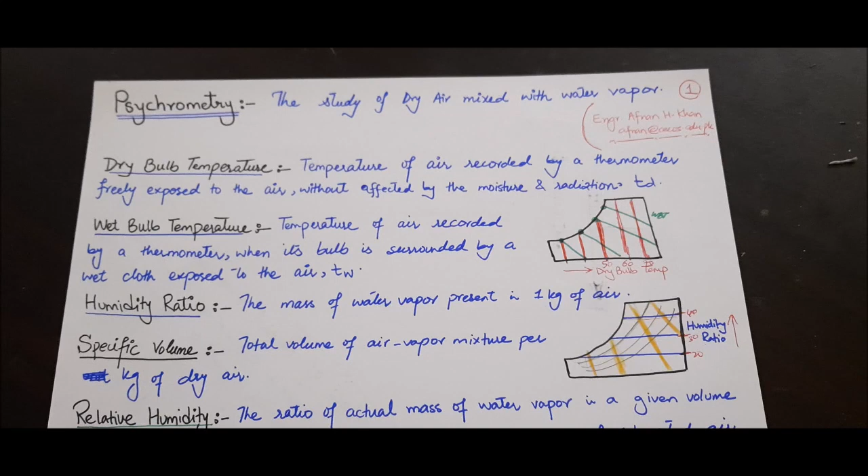आज जो टॉपिक हम पढ़ने जा रहे हैं वो है साइक्रोमेट्री, जिसके नोट्स ऑलरेडी अपलोड हो चुके हैं। तो आज हम उसको थोड़ा सा देखेंगे कि हम साइकोमेट्री या साइकोमेट्री से रिलेटेड जो चीज़ें हैं उसको कैसे पढ़ते हैं।

और जो साइक्रोमेट्रिक चार्ट हैं उनसे हम डेटा कैसे लेते हैं। तो सबसे पहले साइकोमेट्री या साइकोमेट्री है क्या?

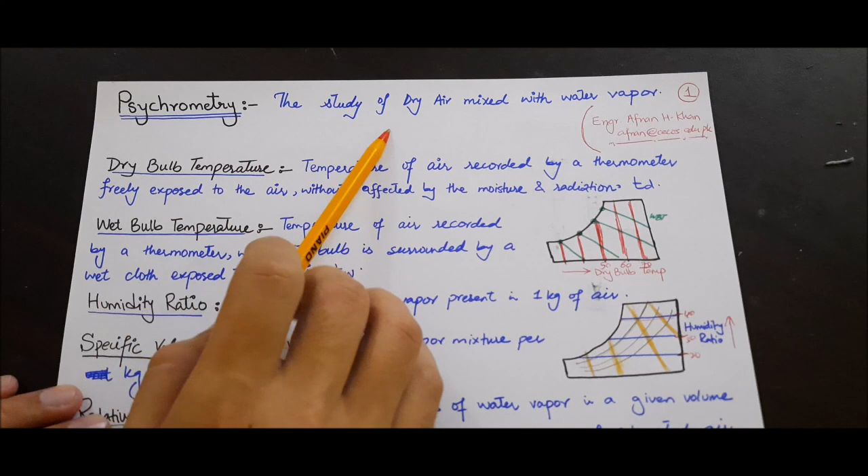साइक्रोमेट्री इज़ बेसिकली द ब्रांच ऑफ इंजीनियरिंग which actually deals with the study of dry air mixed with water vapors. So हम dry air जब water vapor absorb करती है, depends कितनी absorb करती है.

If it absorbs the maximum amount of water vapor, so we called it saturated air. So वो depend करता है कि वो behave किस तरह करती है, तो उस properties को basically हम air properties जो होती हैं उनको पढ़ते हैं, जिसमें air भी हो और water vapor भी हो या ह्यूमिडिटी हो।

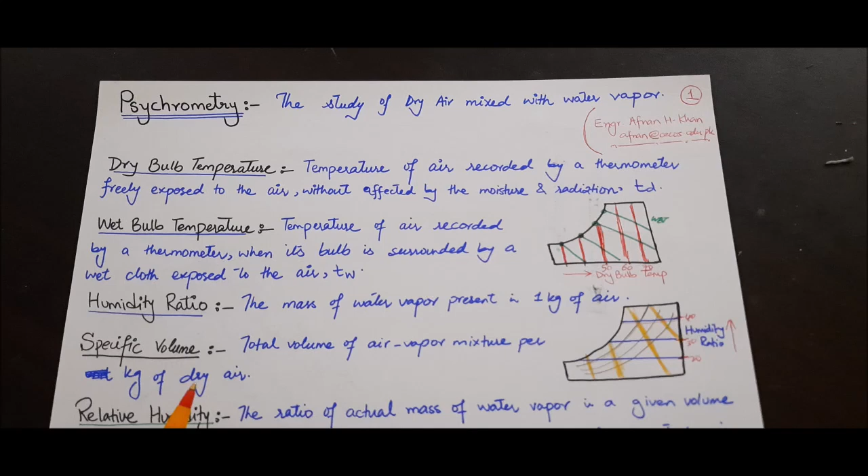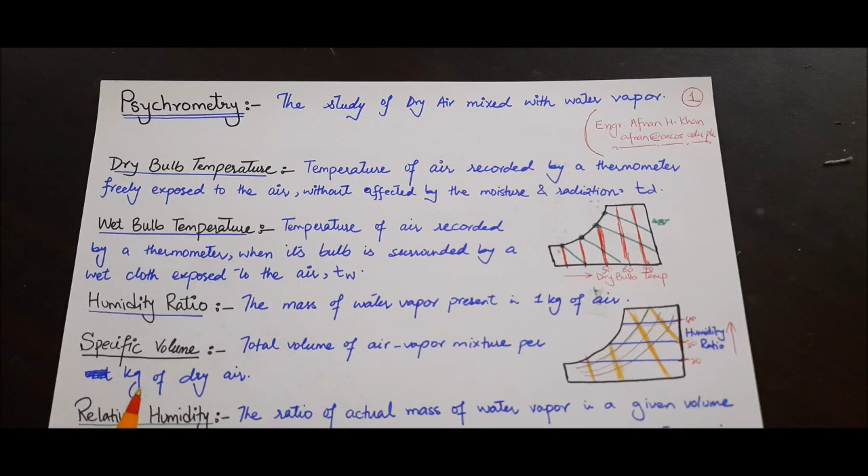अब साइक्रोमेट्री में हमारे पास चंद पैरामीटर्स हैं जो बहुत ज़रूरी हैं समझने को, और वो चार्ट पे हम कैसे पढ़ते हैं या चार्ट में वो कहाँ पे होते हैं, तो उसके लिए आज का ये लेक्चर है।

सबसे पहले हमारे पास है ड्राई बल्ब टेम्परेचर। नाम से ही जाहिर है कि इसमें हम एयर का जो टेम्परेचर है वो रिकॉर्ड करते हैं when it is freely exposed to air without any effect of the moisture or radiation।

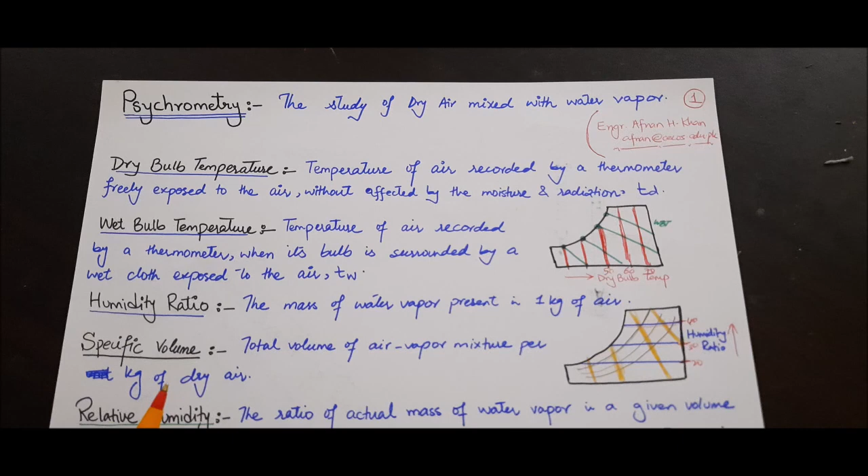और it is denoted by TD, the dry bulb temperature. So dry bulb temperature is the temperature of the air recorded by a thermometer।

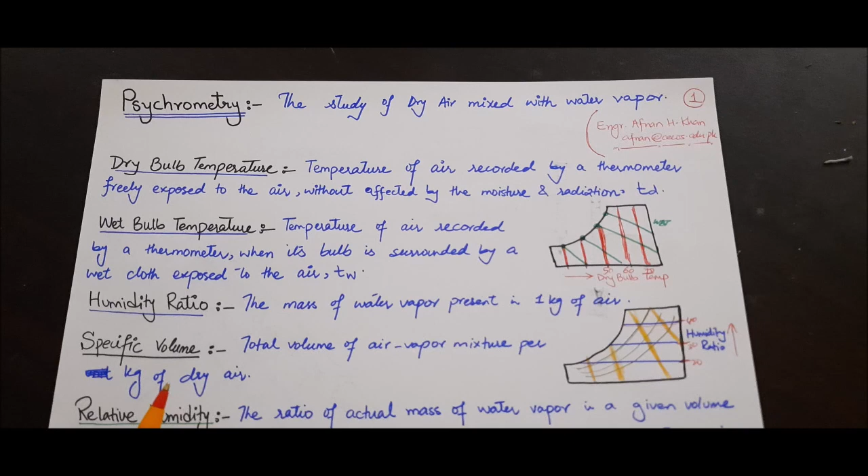By a thermometer it means it is a sensible heating process. So the sensible heating or the sensible heat which has been recorded through a thermometer, when the thermometer is freely exposed to the air and there is no effect of the moisture or the radiation on that thermometer।

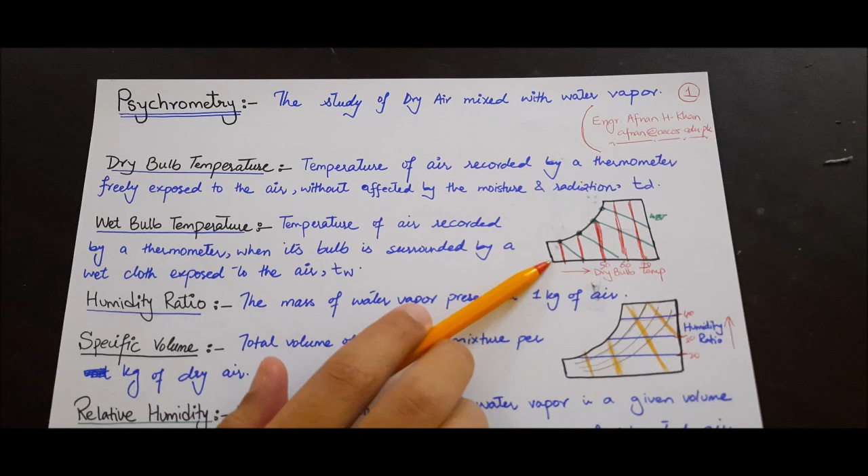अच्छा जी, ये साइक्रोमेट्रिक चार्ट में हमारे पास कहाँ होते हैं? तो ये यहाँ पे आप देखें तो ये हमारे पास इस लाइन पे होते हैं, यानी नीचे हॉरिजेंटल लाइन पे। ये आप देख सकते हैं हमारे पास ड्राई बल्ब टेम्परेचर। इसको रीड कैसे किया जाता है?

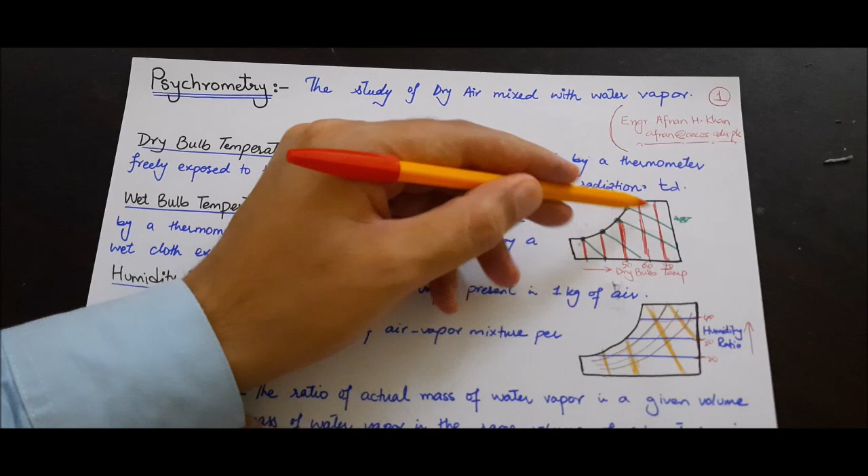तो ये जो बिल्कुल इसके वर्टिकल लाइन्स हैं, ये हमारे पास जो रीडिंग है वो यहाँ नीचे है, और इसका जो लाइंस हैं ये ऊपर बिल्कुल आप देख सकते हैं वर्टिकली अपवर्ड। सो दीज आर द ड्राई बल्ब टेम्परेचर लाइंस ऑन द साइक्रोमेट्रिक चार्ट।

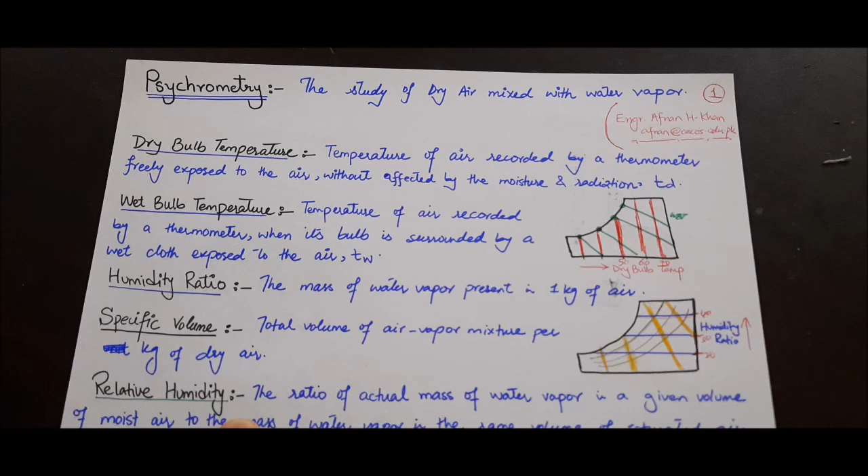अब ड्राई बल्ब टेम्परेचर के साथ साथ हमारे पास चूँकि मॉइस्चर है तो वेट बल्ब टेम्परेचर भी ज़रूरी है। सो वेट बल्ब टेम्परेचर क्या है? ये वही है कि अगर आप एयर का टेम्परेचर रिकॉर्ड करो बाय थर्मोमीटर व्हेन इट्स बल्ब इज सराउंडेड बाय अ वेट क्लॉथ एंड दैट इज़ एक्सपोज टू द एयर।

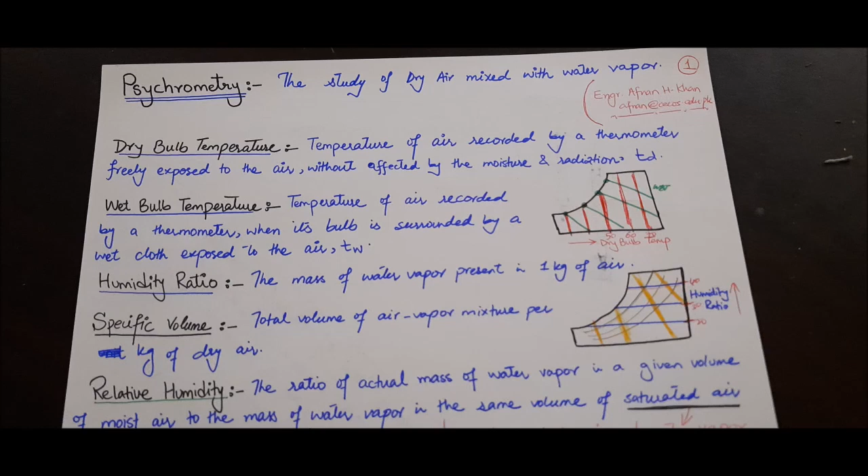तो आप थर्मोमीटर के जो बल्ब है, फॉर एग्जांपल इफ दिस इज़ अ थर्मोमीटर, सो ये अगर इसकी ये जो टिप है ये इसका बल्ब है।

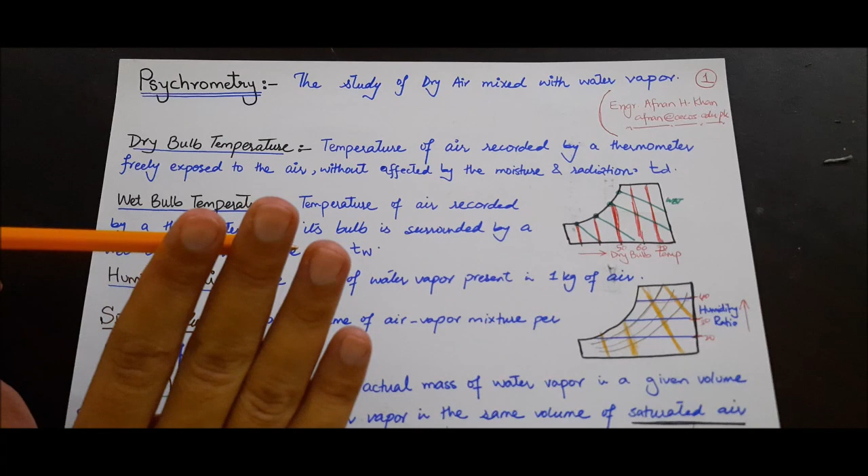तो यहाँ पे अगर वेट क्लॉथ आप इसको कवर कर दो तो उससे फिर जो उसके साथ एयर लगेगी, जाहिर सी बात है फिर वो उसमें मॉइस्चर मिक्स होगा और जो हमारे पास टेम्परेचर आएगा दैट वुड बी द वेट बल्ब टेम्परेचर।

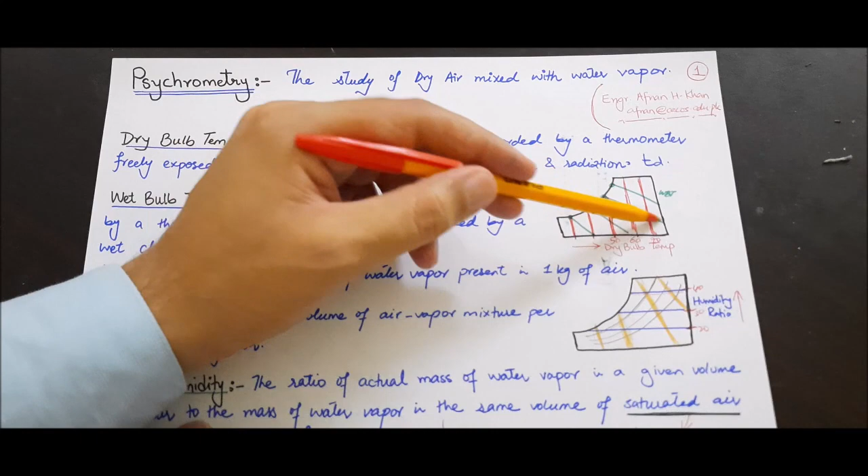अब वेट बल्ब टेम्परेचर कहाँ पे शो होता है? तो ये जो ग्रीन लाइन आपको नज़र आ रही है ये विच इज़ अबाउट 45 to 60 डिग्री के एंगल पे होगी ये, तो ये आपको 45 और 60 के बीच में भी हो सकती है या एग्जैक्ट 45 भी है।

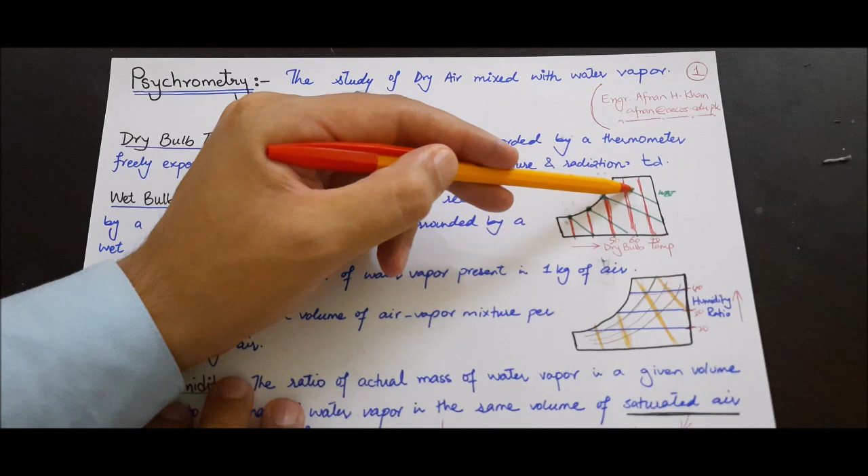तो ये आपको जो है वेट बल्ब टेम्परेचर शो करेंगी साइक्रोमेट्रिक चार्ट पे। आई होप आपको समझ आ रही होगी। ये जो लाइंस हैं ग्रीन कलर की, दीज शो वेट बल्ब टेम्परेचर, करेक्ट।

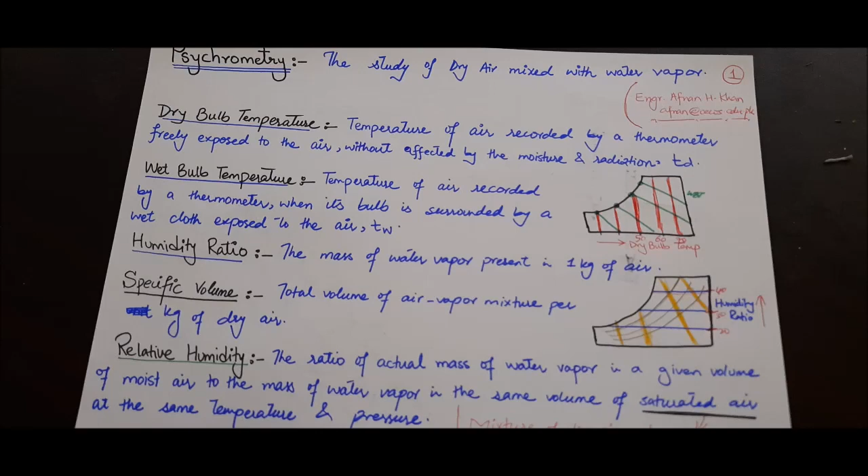नाउ द थर्ड थिंग इज ह्यूमिडिटी रेशो। Now what is humidity ratio? It is the mass of water vapor present per kg of air, यानी 1 kg of dry air के अंदर कितनी वाटर वेपर का मास है।

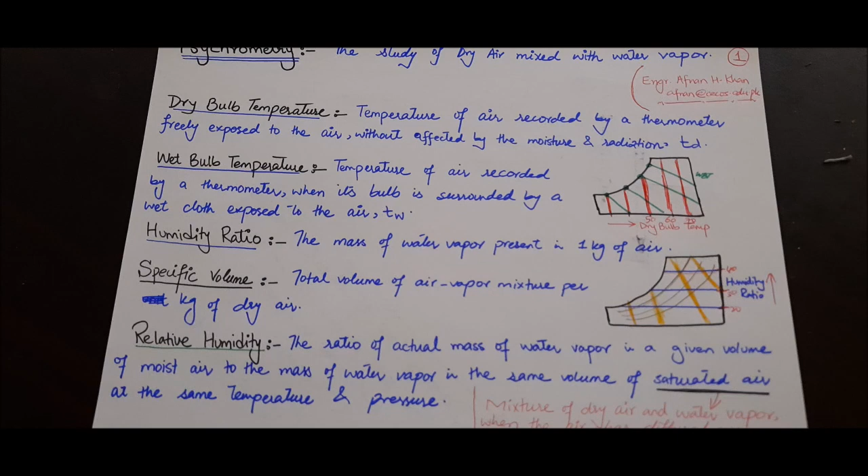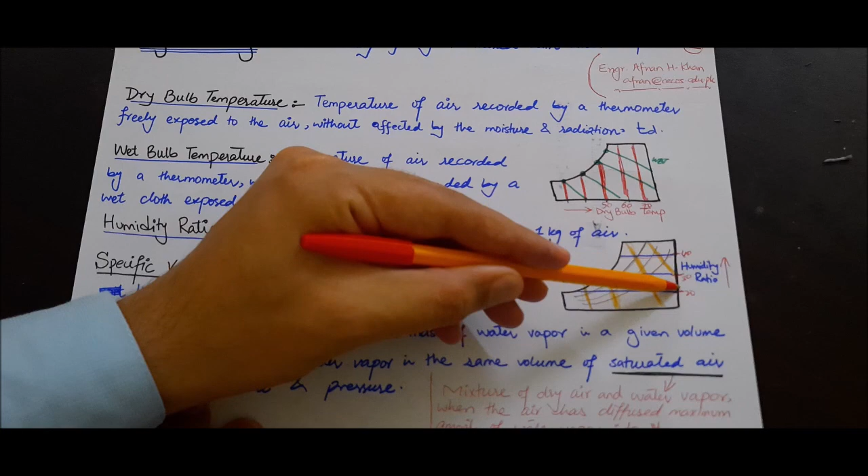सो दैट वुड गिव अस द ह्यूमिडिटी रेशो। अब वो साइक्रोमेट्रिक चार्ट में कहाँ पे शो होता है? तो वो आप ये जो वर्टिकल एक्सिस नज़र आ रही है, सो इस वर्टिकल एक्सिस पे हमारे पास ये ह्यूमिडिटी रेशो है 20, 30, 40, आप ऊपर जाते जाएं बढ़ती जाए।

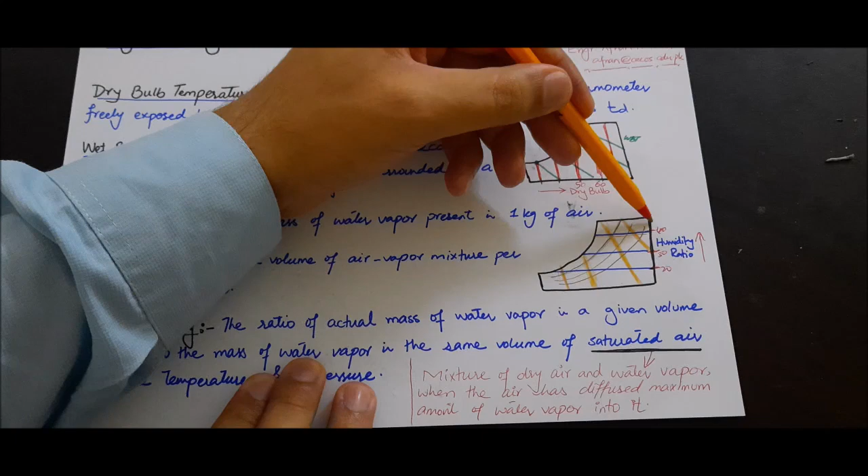देखिए इसका बिल्कुल वर्टिकल ये ब्लू कलर की लाइंस ये हमें शो करेंगी कि ये 20 जो है तो थ्रू आउट ये 20 है। फिर ये 30, ये 40, तो इसको इस तरह रीड किया जाता है हॉरिजेंटली।

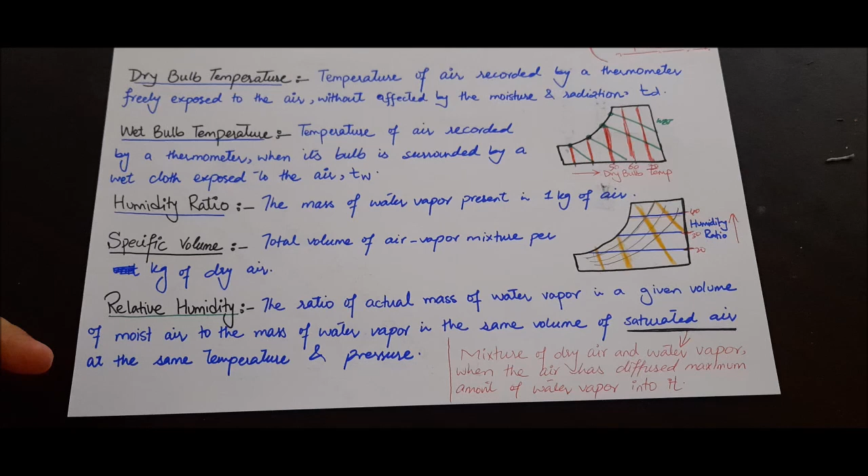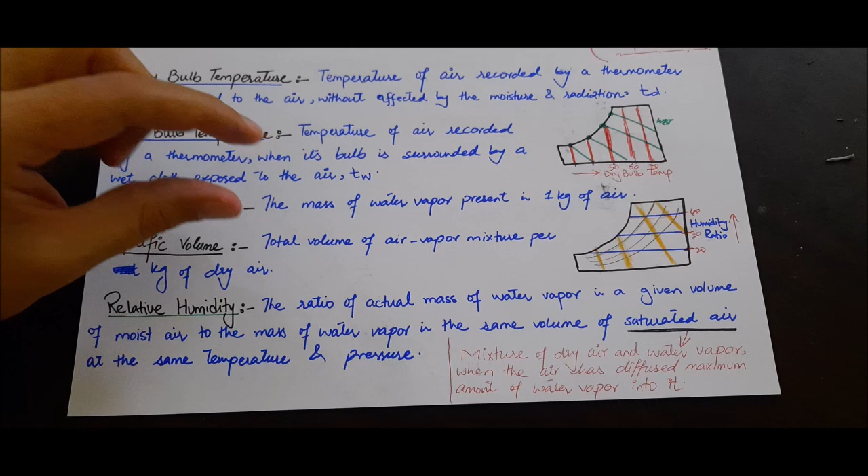इसी तरीके से हमारे पास है स्पेसिफिक वॉल्यूम। नाउ व्हाट इज स्पेसिफिक वॉल्यूम? द टोटल वॉल्यूम ऑफ एयर वेपर मिक्सचर पर केजी ऑफ ड्राई एयर, यानी हमारे पास जितनी भी एयर है इंक्लूडिंग ड्राई एयर इंक्लूडिंग द मॉइस्चर, तो एक वो जो मिक्सचर है हमारे पास ड्राई एयर का और वेपर का, उसका टोटल वॉल्यूम ड्राई एयर के वॉल्यूम के मुकाबले में या पर केजी ऑफ ड्राई एयर कितना है, यानी टोटल वॉल्यूम ऑफ द एयर वेपर मिक्सचर पर केजी ऑफ द ड्राई एयर वुड बी द स्पेसिफिक वॉल्यूम।

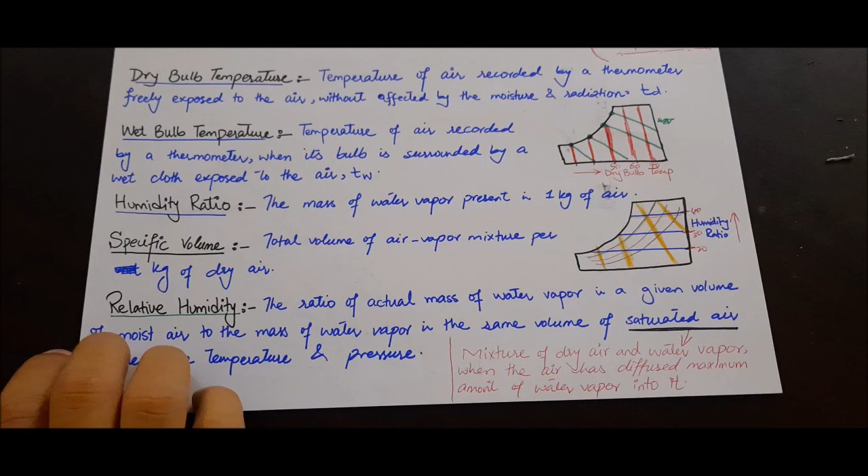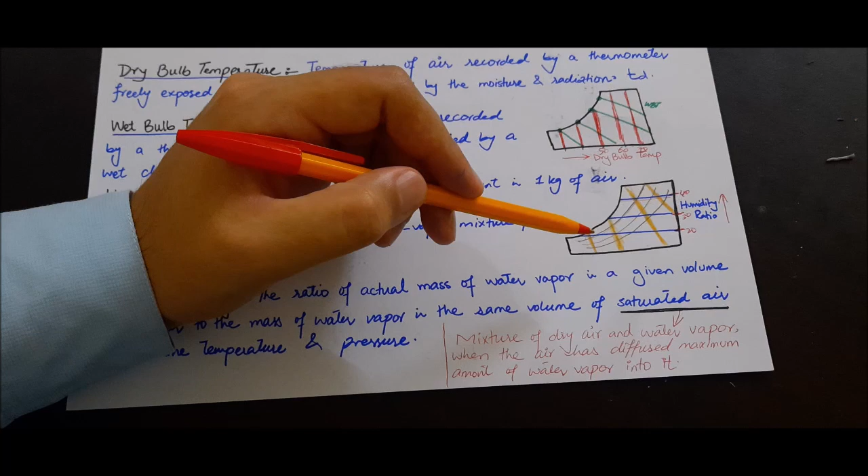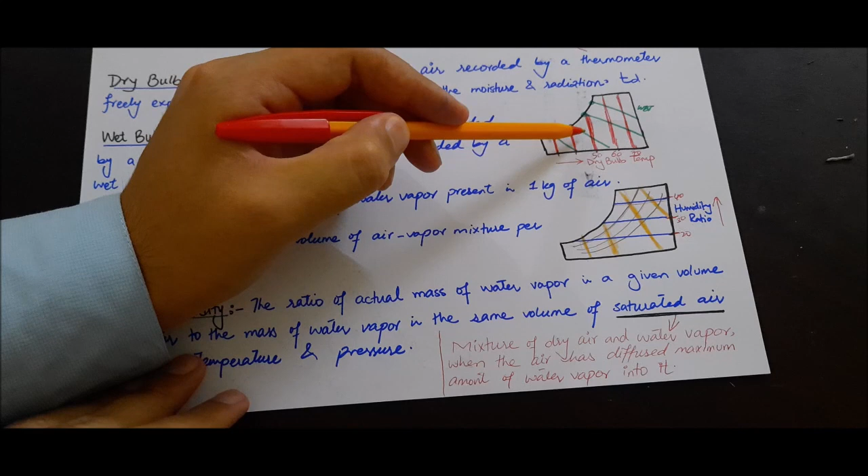अब स्पेसिफिक वॉल्यूम कुछ चार्ट में कहाँ शो होता है? सो स्पेसिफिक वॉल्यूम के लिए ये ऑरेंज कलर की लाइंस आप देख सकते हैं। रिमेंबर इनका जो एंगल है वो 60 डिग्री से ज़्यादा है, यानी ये 70 और 80 इस किस्म का एंगल है। वहाँ ऊपर जो आपको ग्रीन कलर लाइन नज़र आ रही हैं, इन दोनों में फ़र्क है एंगल का। और ये जो लाइंस होती हैं ये नंबर में कम होती हैं, जो कि वेट बल्ब टेम्परेचर की लाइन है ये बहुत ज़्यादा होती है। मैंने बहुत कम लाइंस बनाई हैं ताकि आपको क्लियरली विजिबल हो। अदरवाइज़ जब हम एक्चुअल चार्ट देखेंगे तो आपको पता चल जाएगा कि वेट बल्ब टेम्परेचर की लाइंस बहुत क्लोज होती हैं एक दूसरे के, जबकि ये जो लाइंस हैं ये एक दूसरे से बहुत फासले पे होती हैं, विच एक्चुअली शोज़ द स्पेसिफिक वॉल्यूम।

इसके बाद हमारे पास जो एक और इम्पॉर्टेंट टर्म है साइक्रोमेट्रिक चार्ट पे मौजूद, वो है रिलेटिव ह्यूमिडिटी। अब रिलेटिव ह्यूमिडिटी है तो जाहिर सी बात है हम इसको रिलेट करेंगे विद सम सैचुरेटेड एयर। तो ये है कि द रेशो ऑफ एक्चुअल मास ऑफ वाटर वेपर इन अ गिवन वॉल्यूम ऑफ मॉइस्ट एयर टू द मास ऑफ वाटर वेपर इन द सेम वॉल्यूम ऑफ सैचुरेटेड एयर एट द सेम टेम्परेचर एंड प्रेशर।

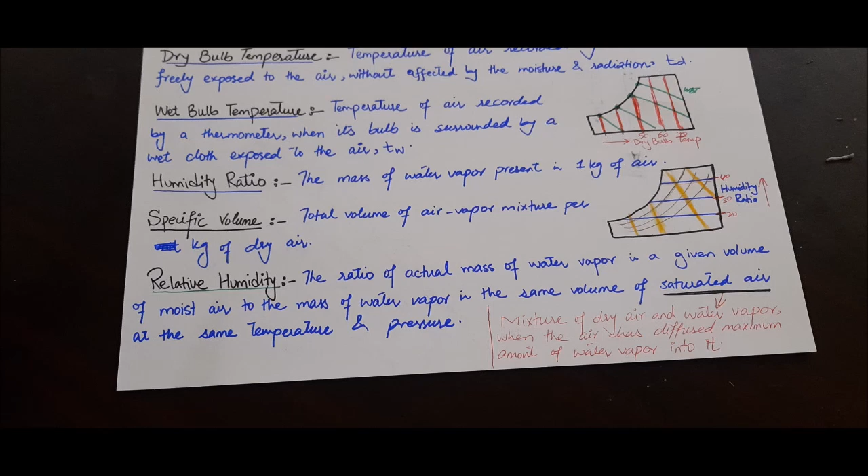अब सैचुरेटेड एयर क्या है, जिसका मैं जिक्र कर चुका हूँ। जब ड्राई एयर मैक्सिमम अमाउंट ऑफ वेपर को एब्जॉर्ब कर ले सो उस एयर को हम कहते हैं सैचुरेटेड एयर। सो जब हम एक्चुअल मास ऑफ वाटर वेपर इन अ गिवन वॉल्यूम ऑफ मॉइस्ट एयर टू द मास ऑफ द वाटर वेपर इन द सेम वॉल्यूम ऑफ द सैचुरेटेड एयर, टेम्परेचर और प्रेशर को चेंज किए बगैर, सो उसको हम कहते हैं रिलेटिव ह्यूमिडिटी।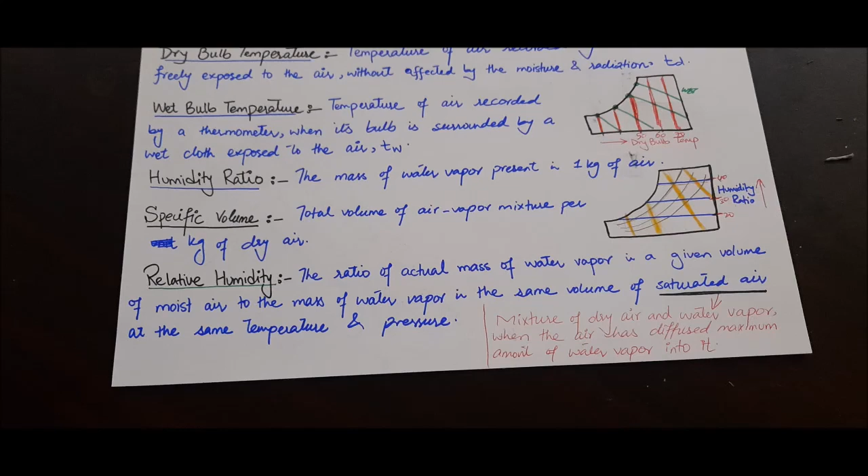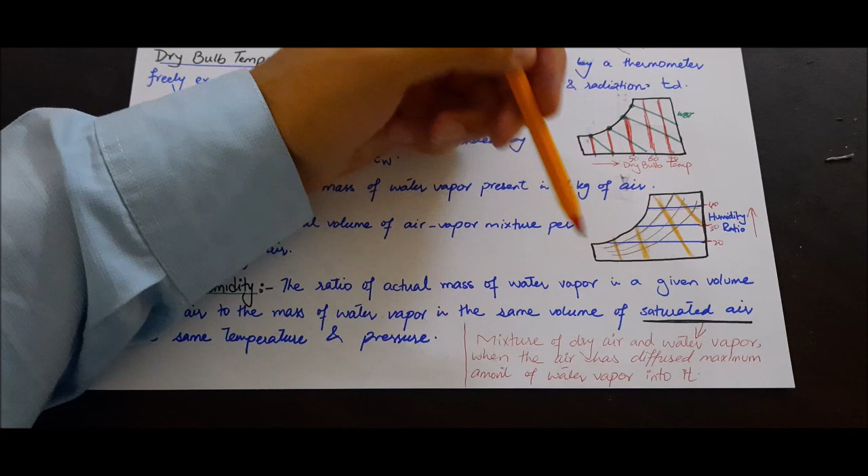अब रिलेटिव ह्यूमिडिटी कहाँ शो होती है? तो रिलेटिव ह्यूमिडिटी हमारे पास अगर आप इस चार्ट में देखें तो ये जो ग्रे कलर की कर्व्ड लाइंस हैं, ये हमारे पास रिलेटिव ह्यूमिडिटी साइक्रोमेट्रिक चार्ट पे शो करती हैं।

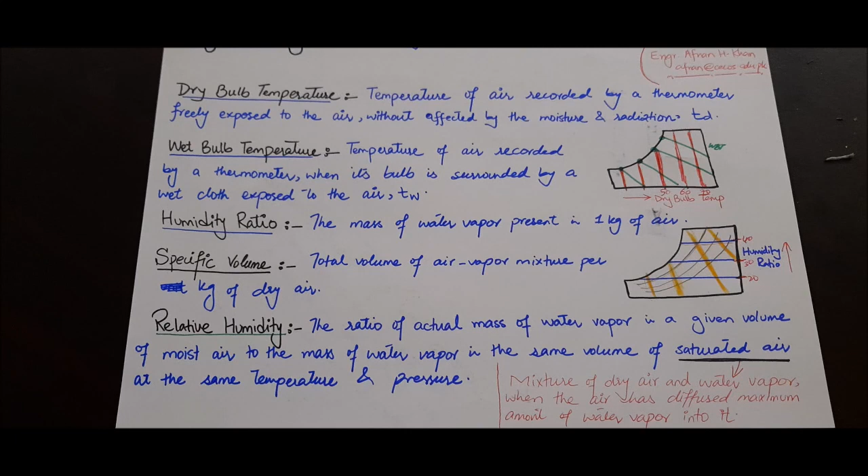तो ये 4, 5, 6 इंपॉर्टेंट टर्म्स हैं। बाकी जो टर्म्स हैं वो आपको जो नोट्स अवेलेबल हैं उसमें मिल जाएंगी, जो मैंने आपको अपलोड कर दिए हैं, आप वहाँ से देख सकते हैं। लेकिन ये चीज़ें साइक्रोमेट्रिक चार्ट में बहुत इंपॉर्टेंट जगह रखती हैं और इसको रीड करना बहुत ज़्यादा इंपॉर्टेंट है कि साइक्रोमेट्रिक चार्ट को हम रीड कैसे करें।

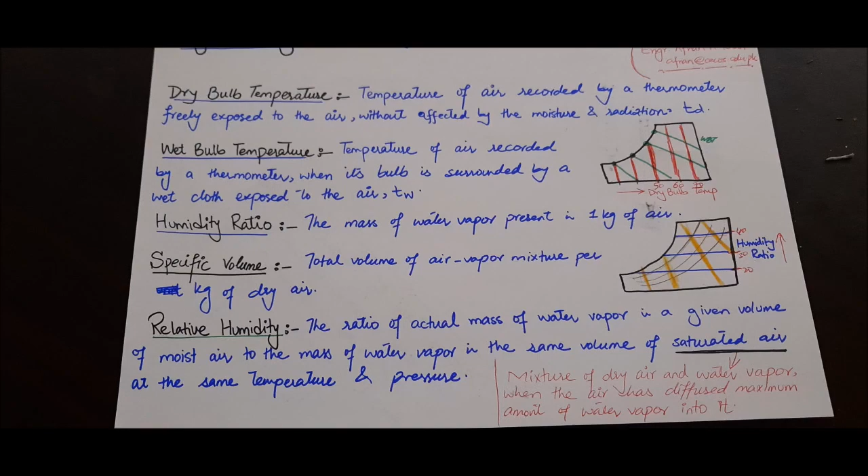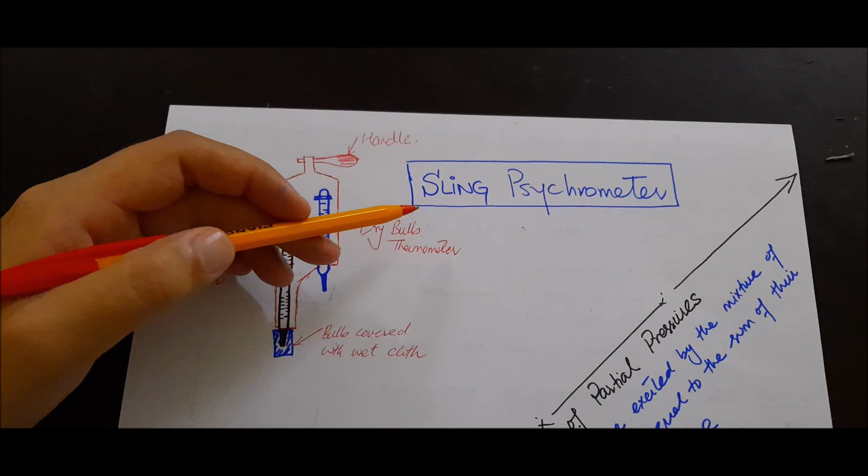अब साइक्रोमेट्रिक चार्ट में जाने से पहले मैं अगर आपको ये बताऊं कि ये हमारे पास एक साइक्रोमीटर है जिसको हम स्लिंग साइक्रोमीटर कहते हैं। इसमें एक ही सेटअप के अंदर हमारे पास 2 थर्मोमीटर्स होते हैं। ये हैंडल है, ये ड्राई बल्ब टेम्परेचर है। इसकी जो बल्ब है वो डायरेक्टली फ्रीली एक्सपोज टू द एयर है, जबकि ये वेट बल्ब टेम्परेचर वाला थर्मोमीटर है इसमें यहाँ पे एक वेट क्लॉथ इस बल्ब के सराउंडेड कवर्ड है। तो ये हमें वेट बल्ब टेम्परेचर देता है और ये हमें ड्राई बल्ब टेम्परेचर देता है। एंड दिस इज कॉल्ड स्लिंग साइक्रोमीटर।

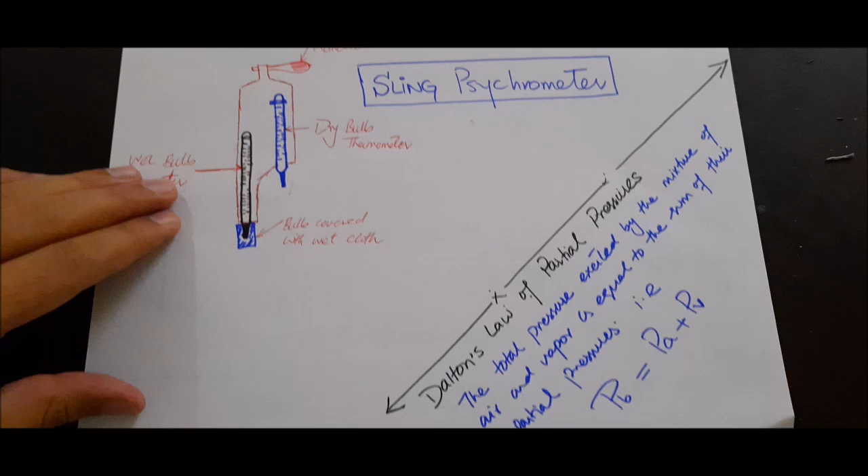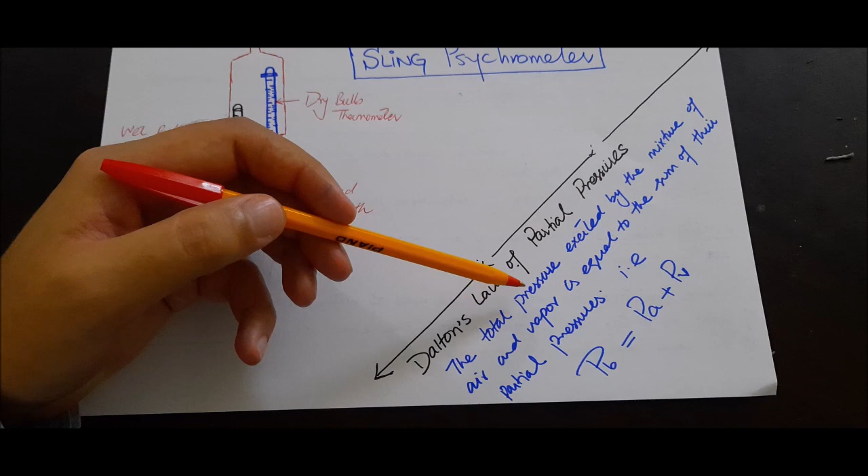इसी के साथ एक ज़िमनी लॉ है विच इज़ डाल्टन्स लॉ ऑफ पार्शियल प्रेशर। तो वो भी थोड़ी सी आप पहले पढ़ चुके होंगे, लेकिन इसको थोड़ा सा देख लेते हैं कि द टोटल प्रेशर exerted by the mixture of the air and the vapor is equal to the sum of their partial pressures। यानी जो बैरोमेट्रिक प्रेशर है हमारे पास that is equal to the pressure of the air, the partial pressure of the dry air plus the partial pressure of the vapor.

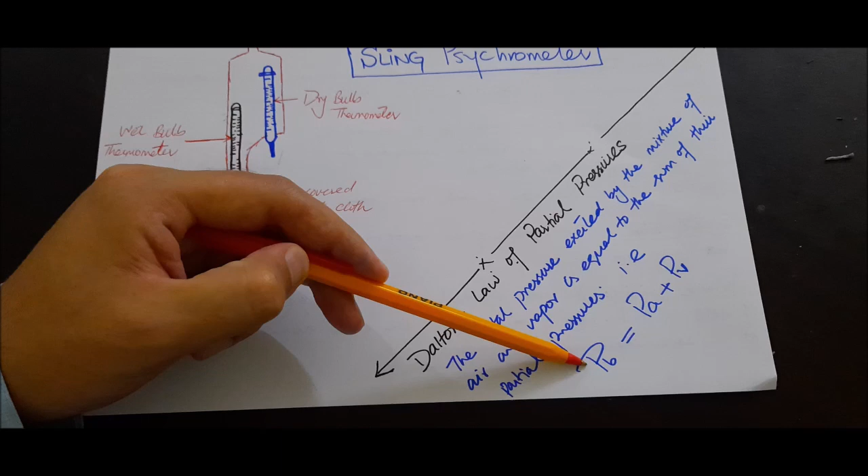So when we add the partial pressures, it will give us the total pressure exerted by the air vapor mixture. This is Dalton's law. It's very simple: if there are 3, 4, or 5 constituents in a particular container, the total pressure exerted would be equal to the sum of the partial pressures of each component or constituent.

But here, since there are only 2 constituents or components, one is the dry air and the other is the vapor, the total barometric pressure would be equal to the sum of the partial pressure of the dry air and the water vapor.

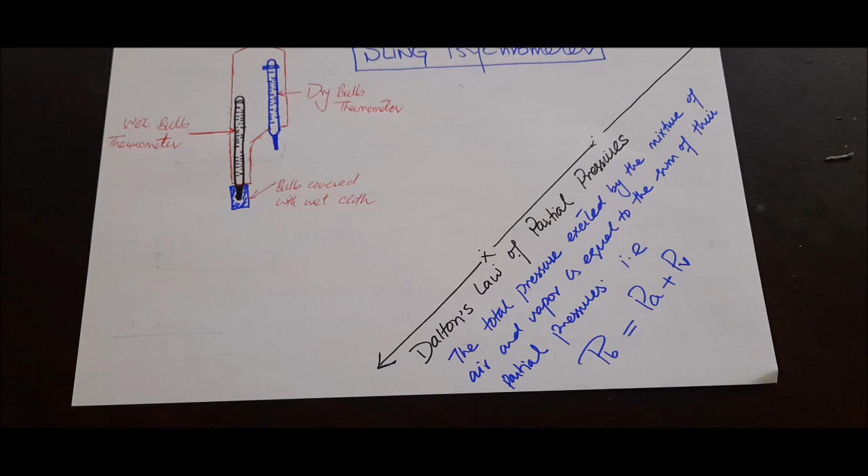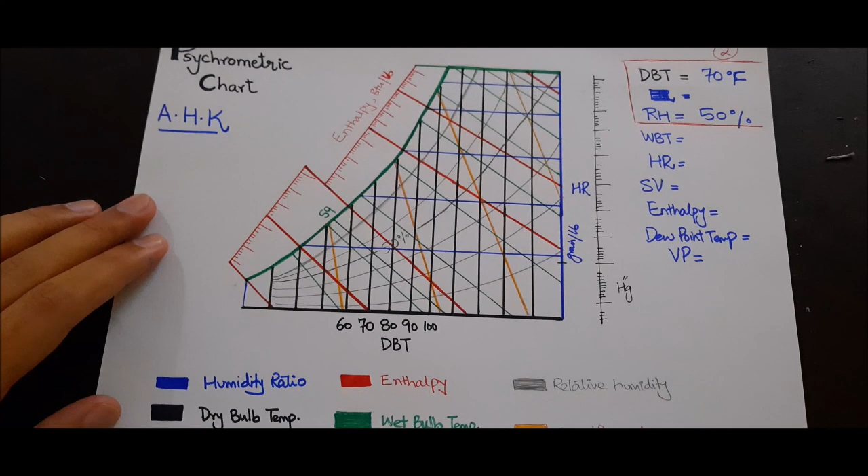Now let's come to the important thing, and that is how to read the psychrometric chart and the different properties. So this is the psychrometric chart. I have used different types of coloring so that you can understand which line shows what.

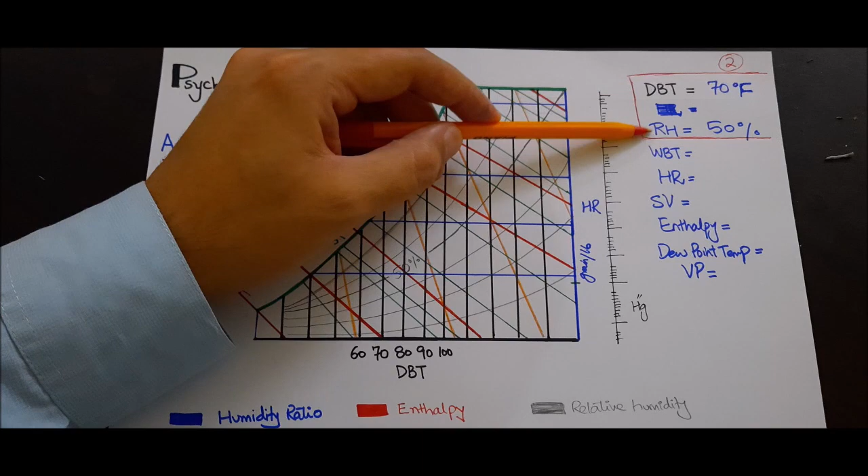Why is it important? It is important because if we know any two psychrometric properties, for example the dry bulb temperature and the relative humidity, with the help of these two we can find a huge number of different other quantities about the same air vapor mixture.

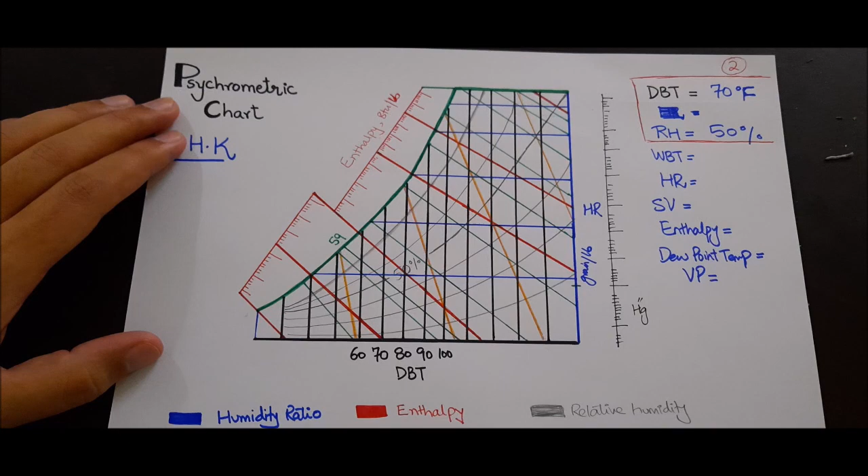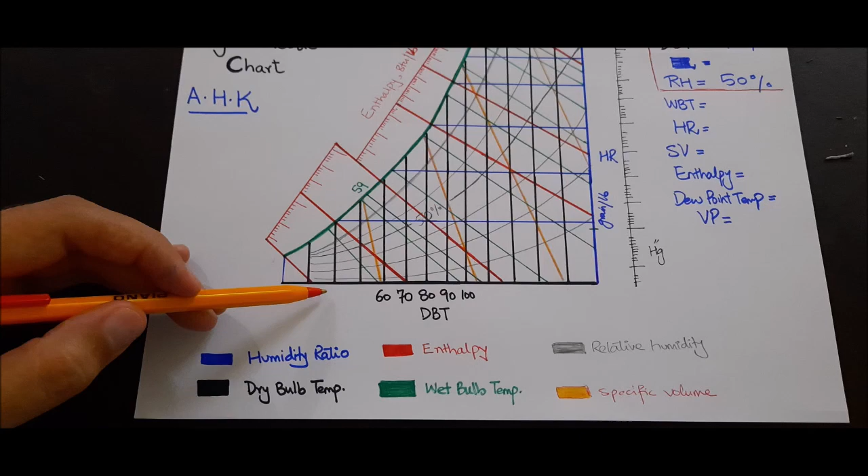Let's discuss the coloring. This is black color, as you can see on the x-axis, and this is the dry bulb temperature, and the vertical lines, these black color lines, are showing the dry bulb temperature. The humidity ratio is on the vertical axis, and these horizontal lines show the humidity ratio.

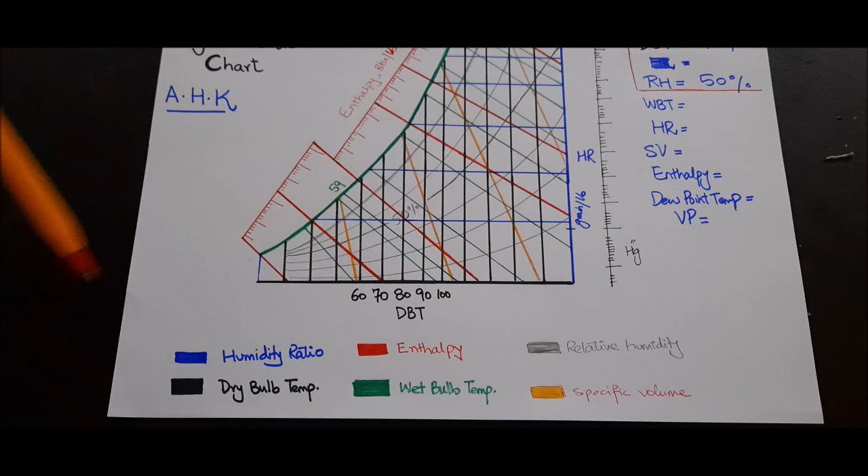These gray color lines, which are curved lines, as I have already mentioned, show relative humidity.

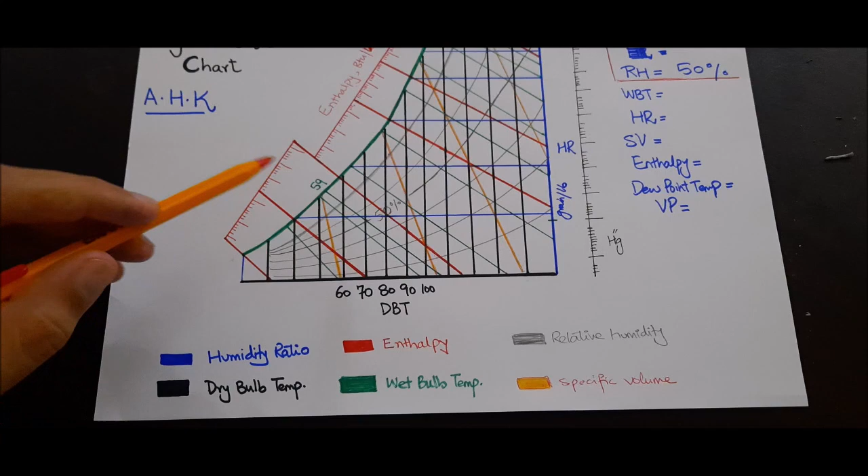This red color lines show the enthalpy, and the enthalpy is right over here outside this chart. These red color lines are the enthalpy lines. Similarly, you can see the orange color lines.

So the orange color lines, as you can see, are the specific volume lines, as I have already discussed.

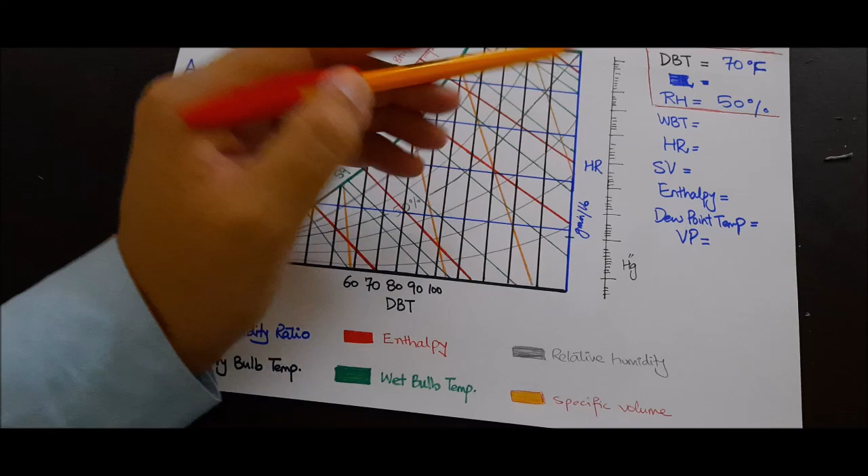And the green color lines are the wet bulb temperature lines, and the angle is quite different and quite visible. You can see these green color lines are at a particular angle, and the specific volume line is at a bigger angle.

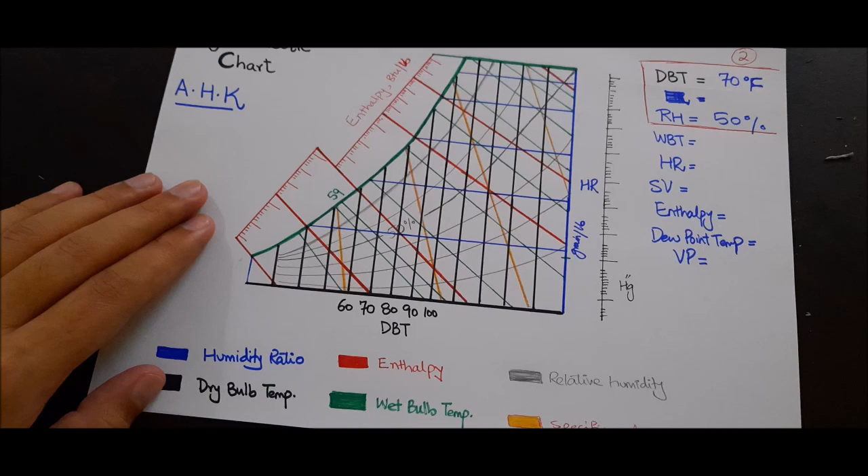Over here, as you can see, this line shows the pressure in inches Hg mercury, that is, what is the pressure at that particular reading. Now, how do we take the reading?

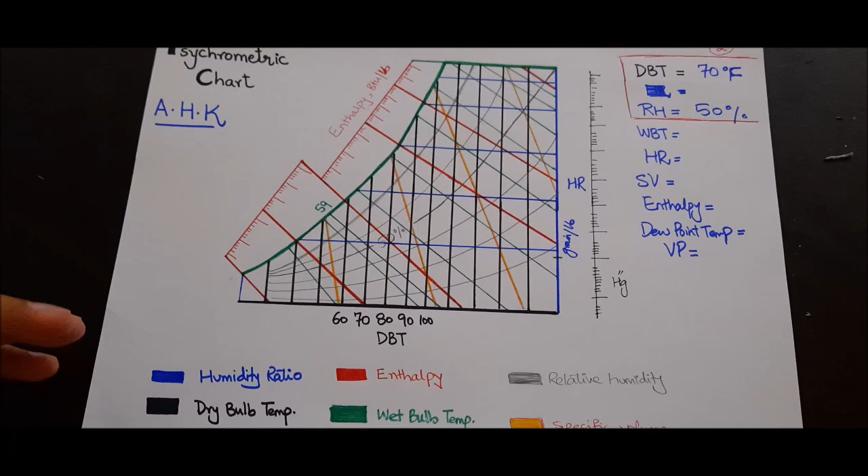Let's assume we have a dry bulb temperature of 70 degrees Fahrenheit. So this line, I will use a marker. This is 70. So this 70 line is this straight black line, right?

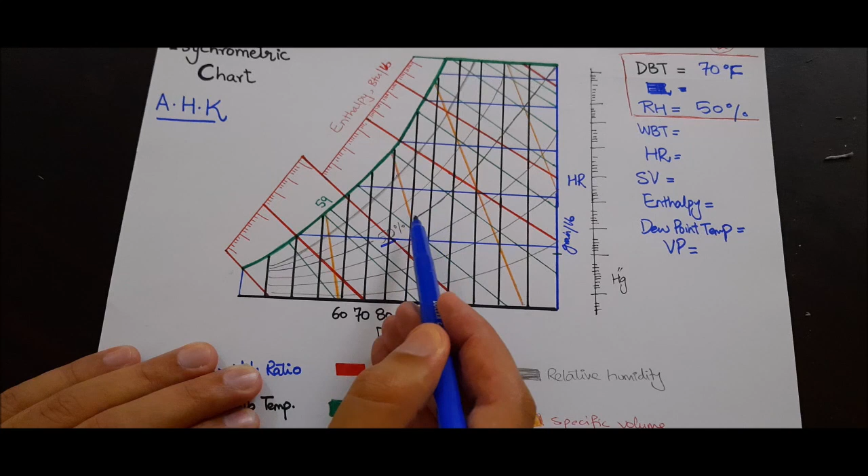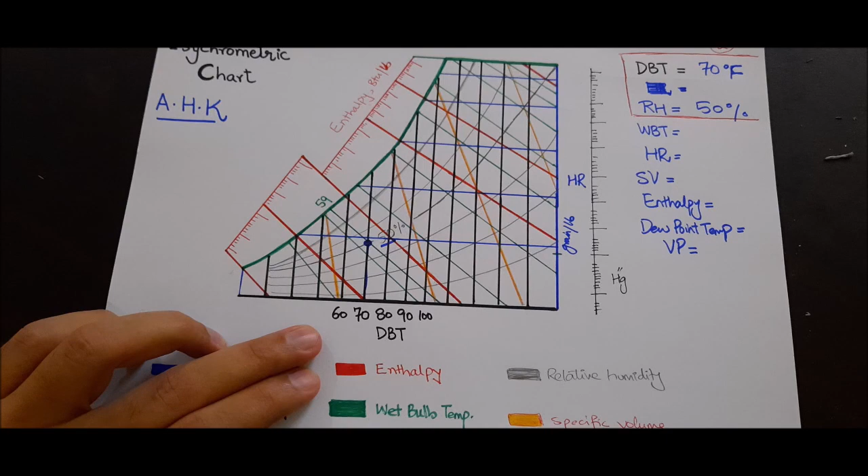And the relative humidity is 50%. So let's assume this is the 50% curve. We are going to move straight like this, and here it is actually encountering that 50% curve. Let me draw it. Okay, so this is 70 and 50%.

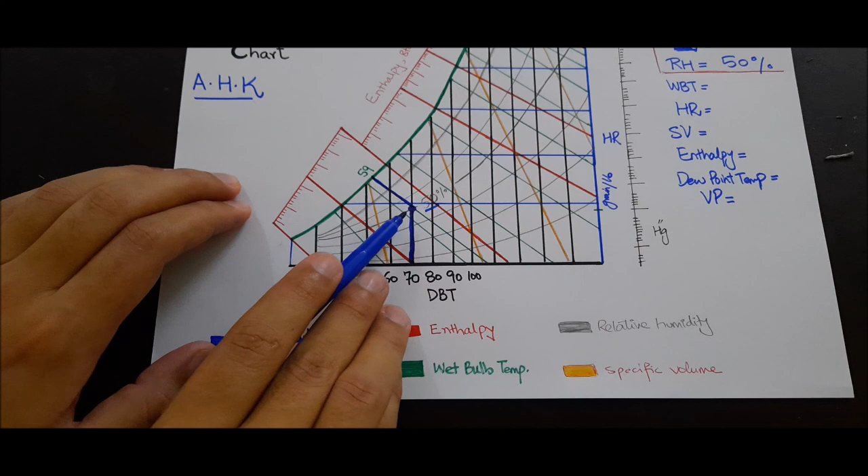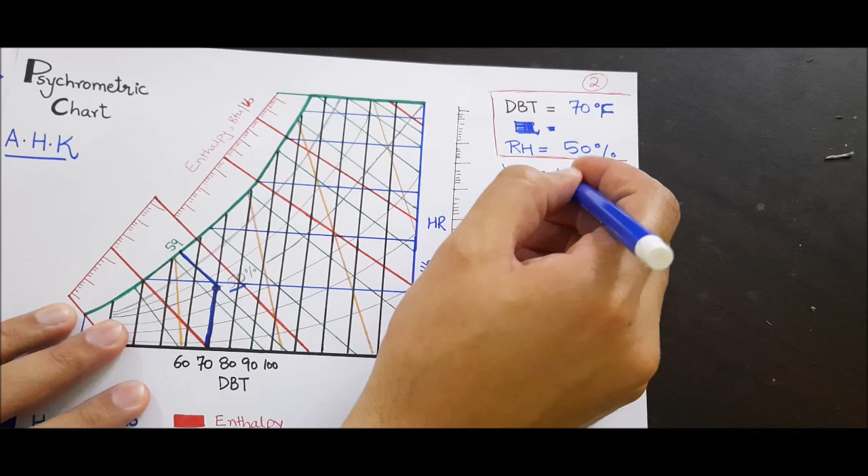Now we can get other information. If we move in this direction, see right over here, this is the green line, as you can see I have covered this green line, and the reading over here is 59. I have not mentioned each and every reading just to avoid confusion. So this is 59 degrees Fahrenheit, and we got the information that the wet bulb temperature is 59 degrees Fahrenheit.

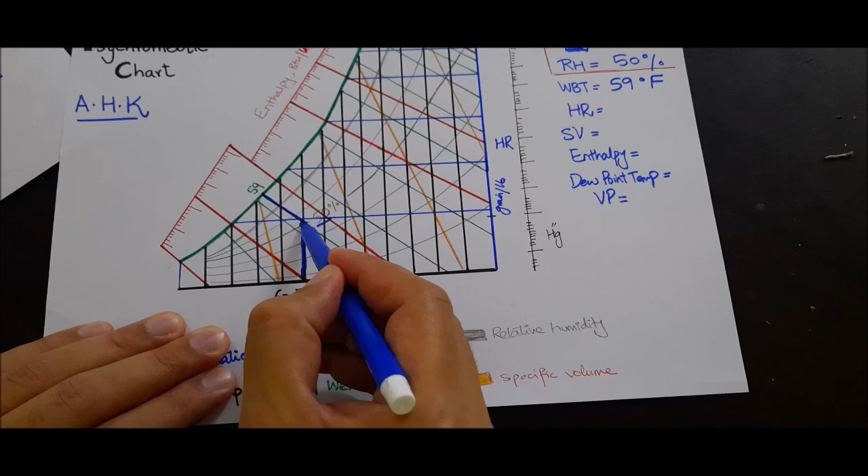Now, if we move in this direction, here we will get the humidity ratio. So if we move straight like this, over here, for this relative humidity, we get the humidity ratio of 56 grains per pound.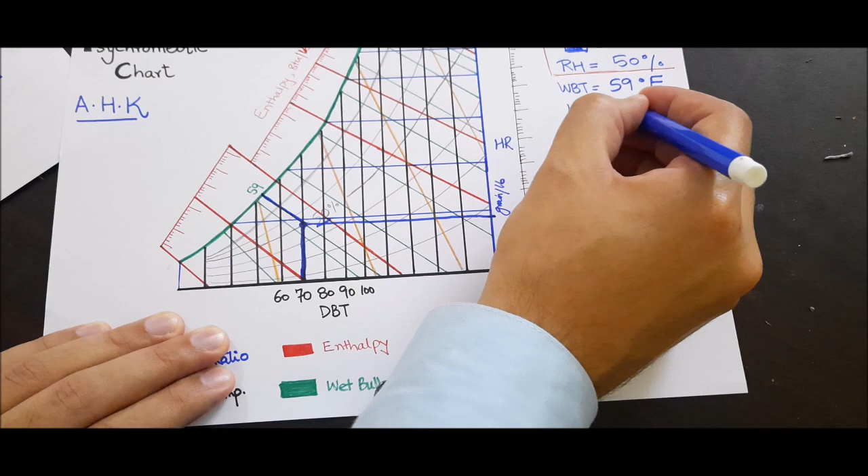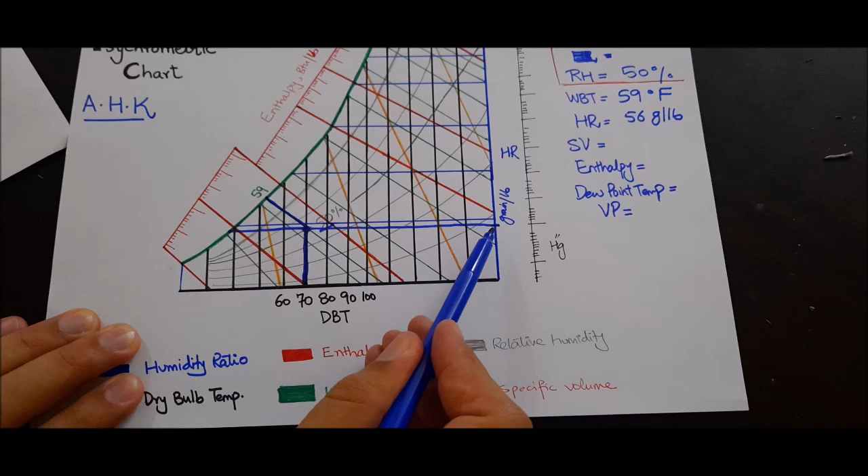Humidity ratio is used in the grains per pound, and that has been discussed in the notes. Please visit that. If we move to the left of this point, to the right we got the humidity ratio, but to the left we got the dew point temperature.

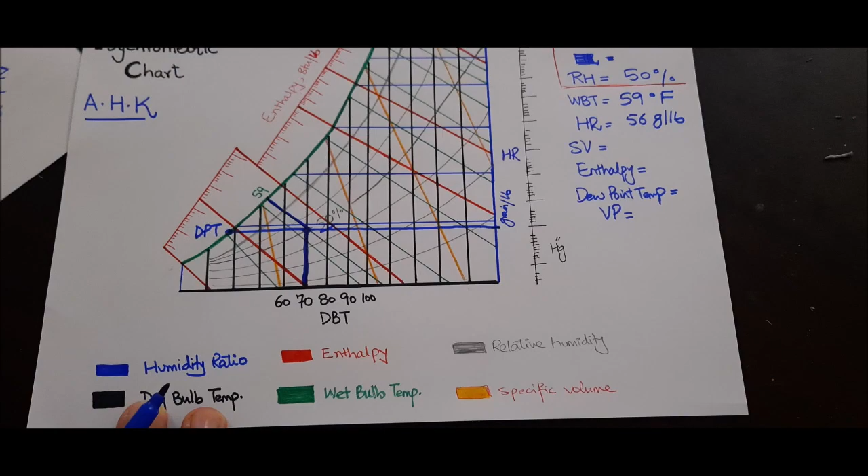Now what is dew point temperature? It is the temperature at which, when the air vapor mixture is condensed and condensation starts, the first dew drop forms. At that particular temperature, when the first dew drop forms, it is called dew point temperature, and the dew point temperature would be 50 degrees Fahrenheit.

So to the right of this point, we had only two pieces of information, 70 degree and 50 percent. The rest is just following the lines and you will get that. To the right there is humidity ratio, to the left there is the dew point temperature. At this particular green line we have the wet bulb temperature.

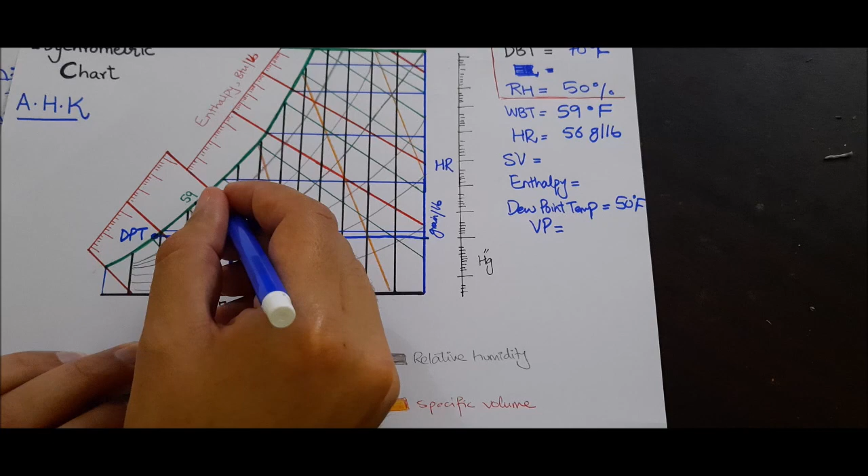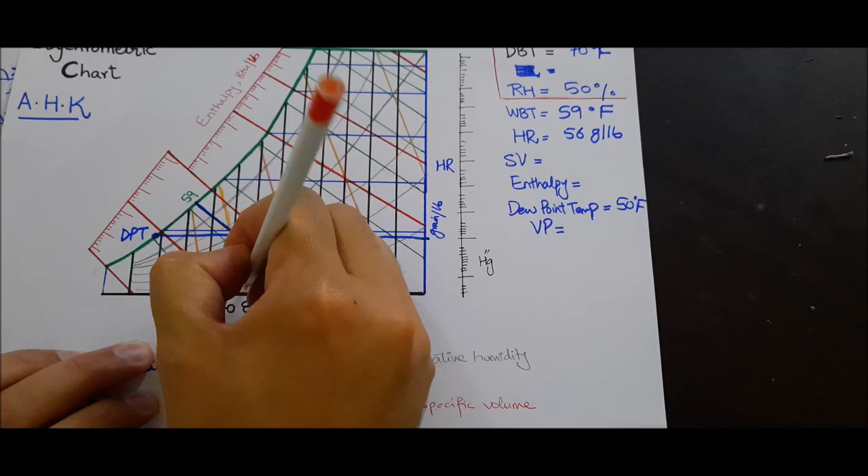Now similarly we have another curve like this. There would be another line, since I have mentioned very few lines to avoid confusion. There would be the line which shows the specific volume, and that would be the orange color line. Let me draw it. This would be the orange color line close to this one. So whatever is close to this one would be that specific volume, and the specific volume would come out to be 13.5 cubic feet per pound.

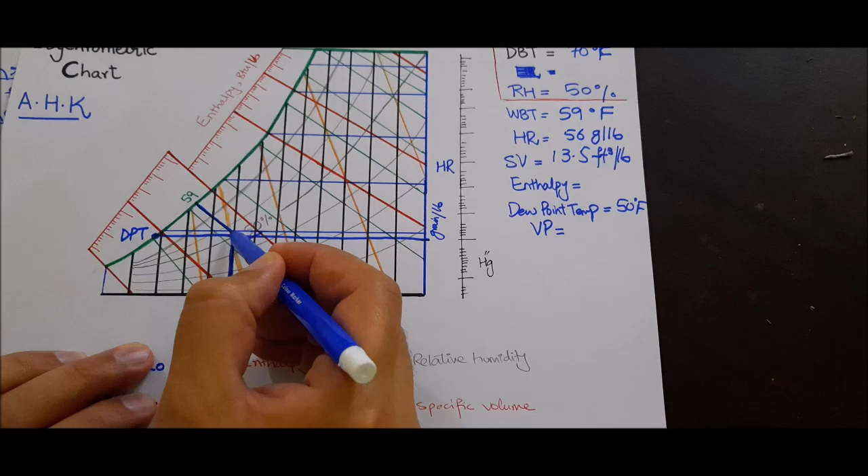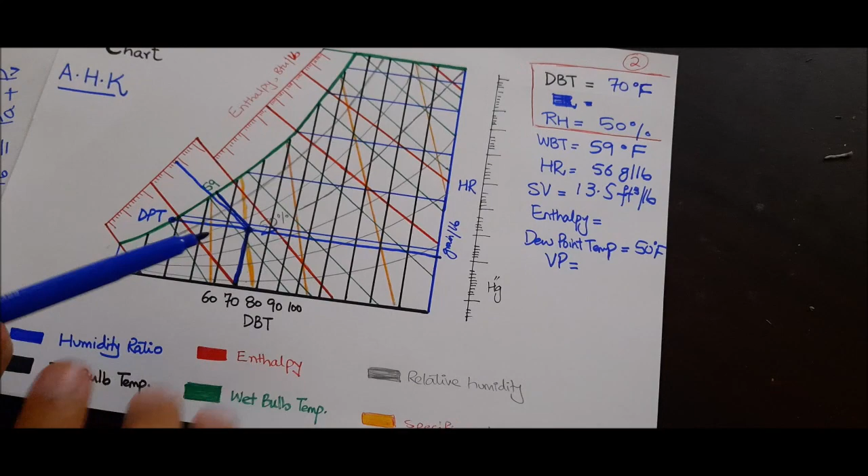And if you extend from here to this enthalpy line, you will get the enthalpy of 26 BTU per pound. I am taking all these readings from the actual chart. I have not mentioned the readings over here in order to avoid the confusion.

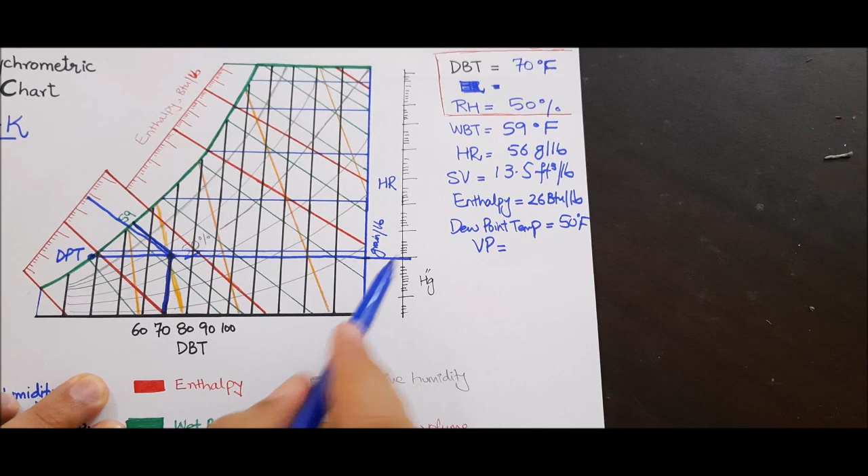And the last thing is the vapor pressure. This is the vapor pressure, as I have mentioned, in inches Hg. So you extend this line, and wherever it coincides, you will get a reading of basically 0.38 inches of Hg. So you can see that by knowing two psychrometric parameters or properties, we have found out the number of other properties of that particular air.

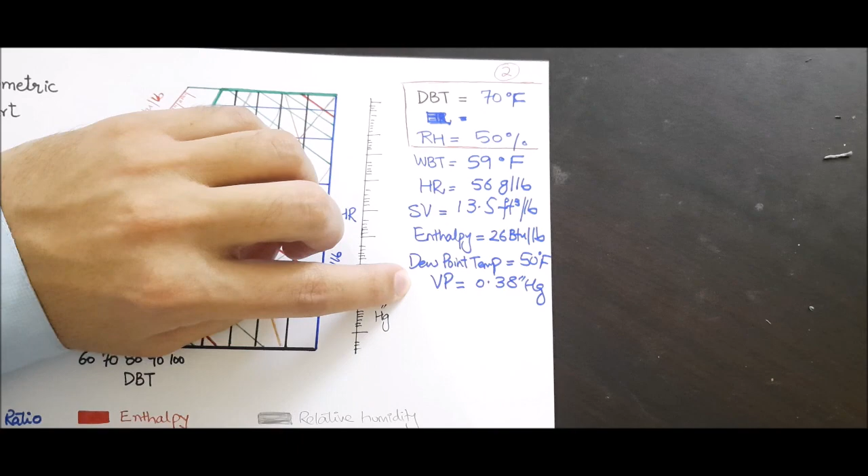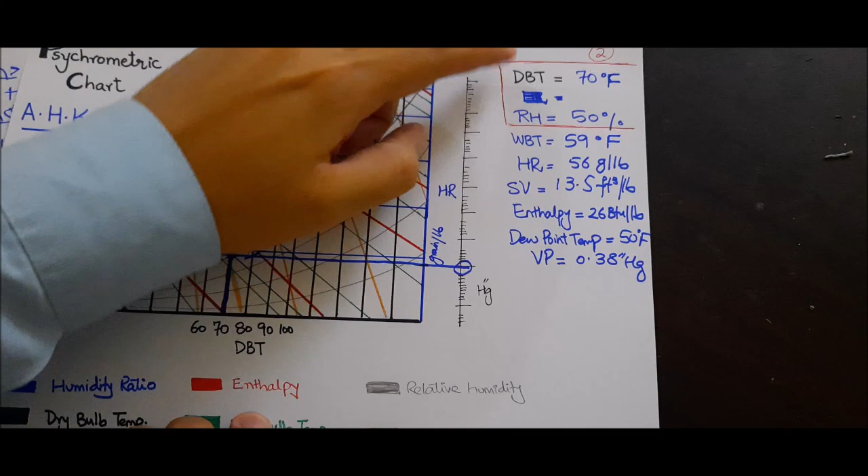That is why psychrometric charts are very important, because they save a lot of time, and you can have an easy hand on the different psychrometric properties if you know any two of them, not necessarily dry bulb temperature or relative humidity, any two of these properties, and you will get the rest of the values.

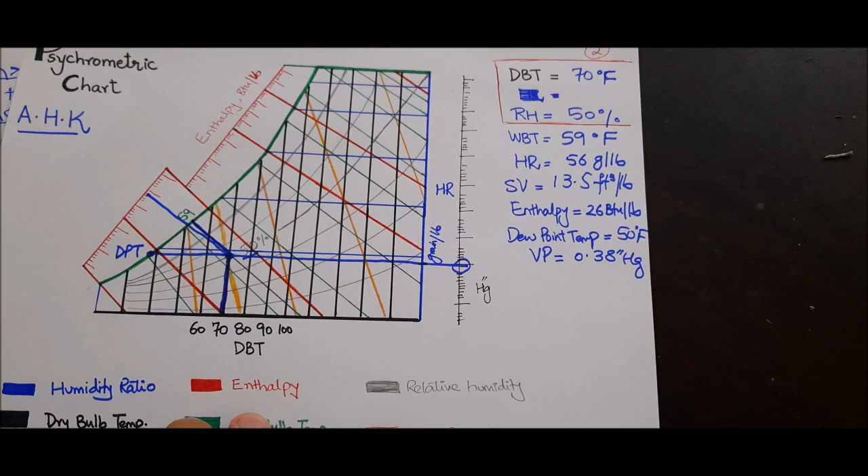So the next topic is the psychrometric relations, what are the relations between the different psychrometric properties, that we are going to discuss in the next lecture, inshallah.

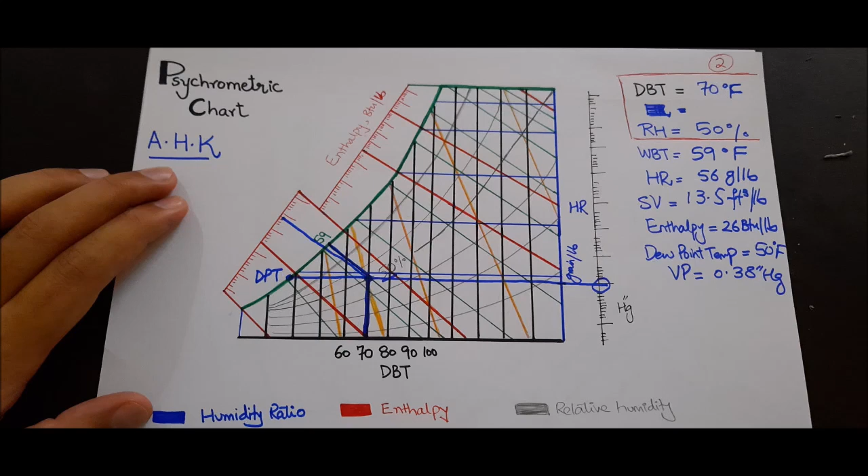You can watch this video again and again, pause it and make your own charts. If you want to take a picture of this chart in order to understand, just pause it, rewind it again and again, and you will see how easy it is to read this particular chart. Some students find it difficult to read, but it's not difficult. It's really easy if you know how to read it. You have to follow the lines from that particular point, and you will get those values on the chart. If you have any query, ask me. Thank you.